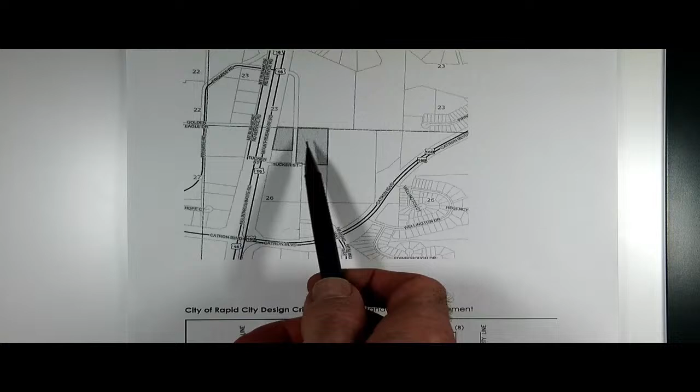Good afternoon, thank you committee for giving me the chance to speak. I'll try to make this brief. I am a property owner in the northeast quadrant of Highway 16 and Catron Boulevard. It's basically the only quadrant that hasn't been cleaned up and developed at that intersection. The DOT is going to be constructing an overpass at the intersection of Highway 16 and Catron. As a result of that work and the changing of the highway bed, Tucker Street to the north is going to be eliminated. These parcels are the two that I own, and these parcels are all of them that now take access from Tucker Street.

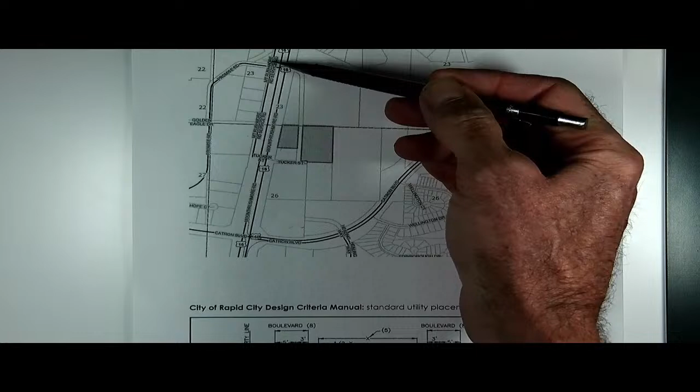As part of the abandonment of Tucker Street, the DOT is going to be constructing a city street, Promise Road, that will be coming down right here. Currently, city sanitary sewer comes along Highway 16 on the east side, and water is on the west side. The DOT is planning to construct Promise Road without putting in water and sewer. For whatever reason, they can build city streets without following the city's design criteria manual, nor get exceptions to that. For the DOT to do their work, they need right-of-way from me as well as construction permits.

When they initially told me they were going to be doing this work, I told them you are not going to have any problems with me. And when I saw the design, I'm like, well, where's the water and sewer? And they told me that they don't build water and sewer. In fact, they went so far as to design Promise Road without even surveying in the existing sanitary sewer and the effect that that would have on the road grade. And I told them I am not signing off on any street that serves my property that doesn't have the plumbing in the street. That makes absolutely no sense to me.

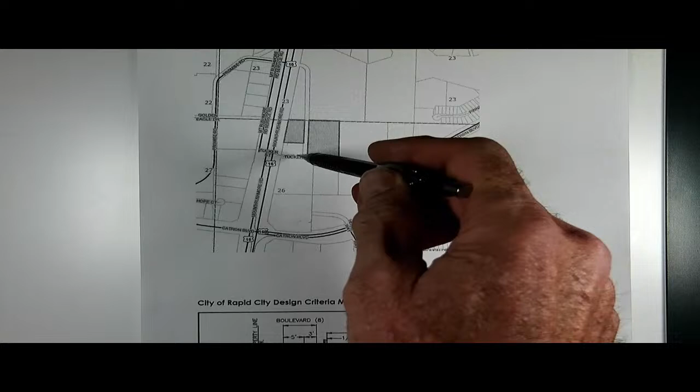I've talked to Public Works in the past. I'm like, the city does have some tools to facilitate the construction of the water and sewer, like doing an assessed project or charging hookup fees or whatever. I am willing to pay my fair share so that I got a street that I can use. And that apparently hasn't gone anywhere. At this point, the DOT is ready to begin a condemnation, and I want to get on the record saying that I do not support constructing a city street without water and sewer in the street. I'm prepared to do what I can to help, but I cannot build all this water and sewer for these property owners when I have no tools to recover that capital expense.

I know that we can't discuss that. I'm happy to take any phone calls or help that I can get from the city council to push Public Works into coming up with a solution with myself and the Department of Transportation. Thank you.

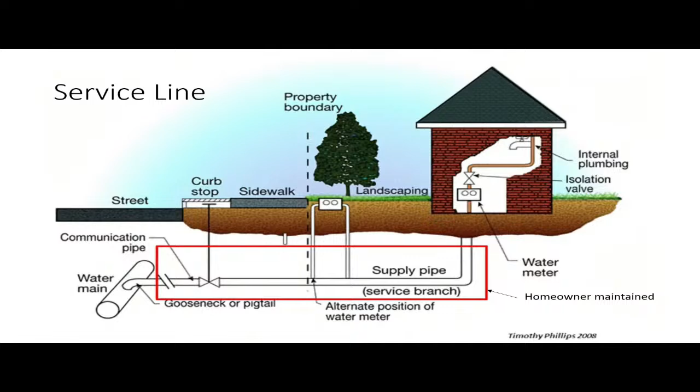The service line inventory was completed by looking at historic records, design standards, service line cards, inspections, and customer inspections. All service lines needed to be categorized into 4 different categories. The first being lead, the second is galvanized requiring replacement. Galvanized requiring replacement are galvanized steel lines that at any time may have been

downstream of a lead service line. We also have our unknown lines, anything that we could not identify any materials based off our survey of records. And then non-lead. Rapid City chose to identify the specific material when we encountered non-lead.

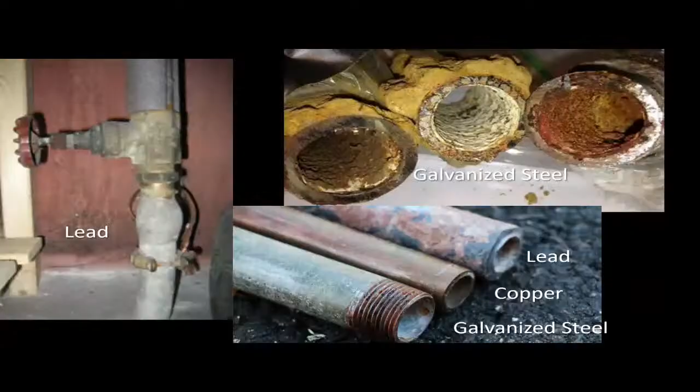So some quick examples of some of the lines, these are the ones you'd see most. Copper specifically is the one we would see the most, that's our preferred material for service lines. The picture on the left is a characteristic lead service line - lead has that wiped joint, it's a little bulbous material where they connect to a fitting.

Galvanized steel there on the top right shows the issues with galvanized steel. As soon as that galvanic protection on the inside wears out, you start getting rust inside the pipe, and that rust can start accumulating heavy metals, including lead. If you have a disturbance of the line, all of that rust can get knocked off in one shot and can give a large dose of lead to people inside that household.

So the Rapid City inventory took a 3-step approach. I did some pretty extensive digging through historic records and was able to pin down February 14th, 1980 as our first city ban on lead and galvanized steel lines. Our first step approach was if a household and street infrastructure was installed after 1980, we knew those houses were non-lead. We didn't specifically know what material it exactly was, but we knew it wasn't going to be lead or galvanized steel, so we weren't concerned about it.

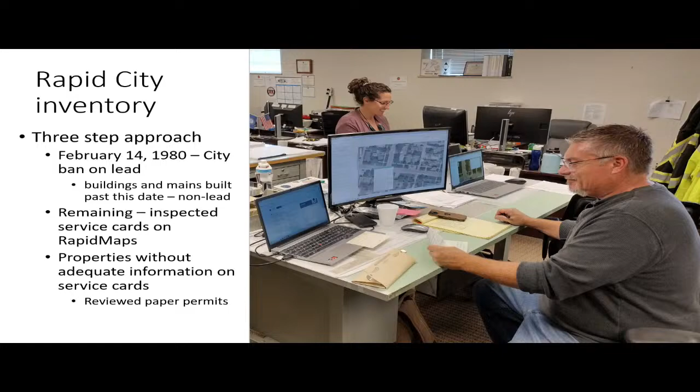So our totals, we're looking at about 109 lead lines that we identified. Galvanized requiring replacement was 142. Realize there are still some galvanized lines that count as non-lead, because if there was never lead upstream of that, it wouldn't count as galvanized requiring replacement. There's not that same risk of that flush of lead with the rust breaking off.

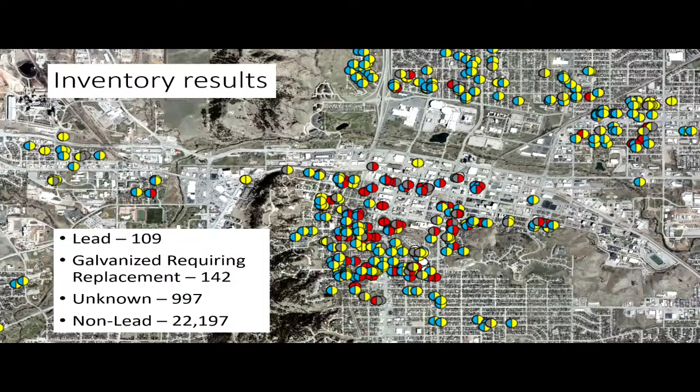We were not able to find documentation for just a hair under 1,000 of the properties. For some of those unknowns, we did identify half of the service line, we just couldn't identify what the material was for the whole service line. And then we were fully able to classify a little over 22,000 as non-lead.

The lead service line inventory needs to be posted online for Rapid City. Any utility that serves more than 50,000 customers has to have that online. We've chosen to accept the offer from South Dakota State to host the data on their master service line inventory, so the inventory will be accessible on their website, sdwaterpipes.com, and all of the inventory will be hosted there for the whole state.

We'll also have to submit letters each year moving forward for any of the properties that have identified lead, galvanized requiring replacement, or unknowns. That includes both the property owner and any renters in those properties. Our first planned release of letter notifications will start October 7th, and we'll release a portion every week until October 28th. Everyone will have to be noticed by November 15th to stay compliant with the code.

Some of the content of the letters: for customers that have unknown service lines, we'll direct them to go to sdwaterpipes.com. The state of South Dakota has set up a sampling protocol where you can use a magnet, do a scratch test on your service line, and take a picture based on the criteria in the survey. It should help you identify what type of pipe material you have, and that picture will help us identify the pipe material in the house. If customers have issues performing the survey themselves, we'll look at having staff support them and try to identify the materials from inside the house.

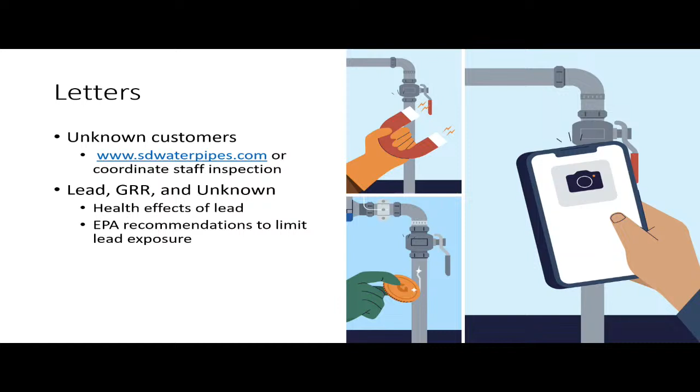All of the letters for lead, galvanized requiring replacement, and unknown will have EPA required language about the health effects of lead, and recommendations that the EPA put together to limit lead exposure.

A quick summary of how to reduce lead in drinking water: unlike some other contaminants, boiling water doesn't remove lead, so the lead will stay in water if you boil it. The best thing to do is flush the water outlets you use for drinking and food preparation. You can flush a line by opening the faucet and allowing the water to flow until it stops changing in temperature, getting colder over time. Wait until it's cold and at a steady temperature, then you know you've flushed all of the water out of your lead service line.

Regularly clean the outlet screens and aerators, which typically just screw off of the sink. Cleaning those regularly will help eliminate some lead impacts. Use cold water for drinking and cooking, so don't try to take a shortcut. If you're boiling water for spaghetti, don't turn on the hot water faucet. Make sure your water is cold, then use cold water to boil for food. That is especially important for baby formula.

If you choose, you can use a point of use filter. It just needs to be NSF 61 certified, and those can eliminate any type of lead that's in the water.

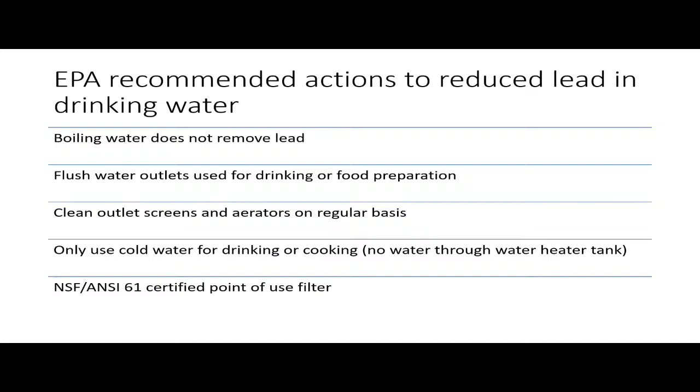Our service line inventory was part of the lead and copper rule revision, which is our current code. Hopefully in the next 2 weeks, we'll have the lead copper rule improvements finalized. The upcoming rule will obligate that all lead and galvanized requiring replacement lines be replaced within 10 years, after a 3-year period to try to identify all unknown service lines. If the code is issued this October, that would put all of our lead and galvanized requiring replacement lines on a deadline to be replaced by 2037.

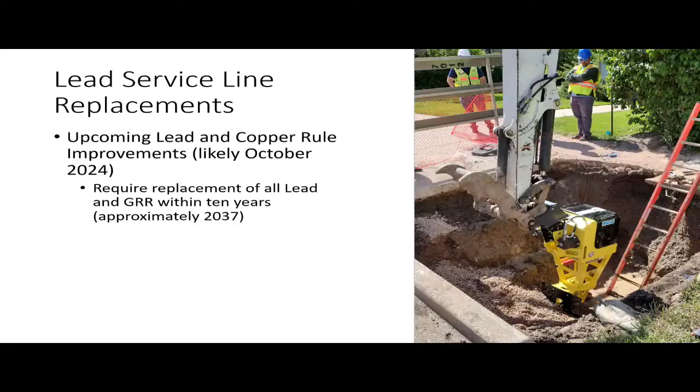There's a little device that pulls a cable all the way through the service line. That device grabs onto the new pipe. This new pipe here happens to be an HDPE service line. A tracer wire is followed along there so we can flag where that service line is in the future, and the pipe pulling equipment will pull the new pipe right behind the old pipe as we pull it out.

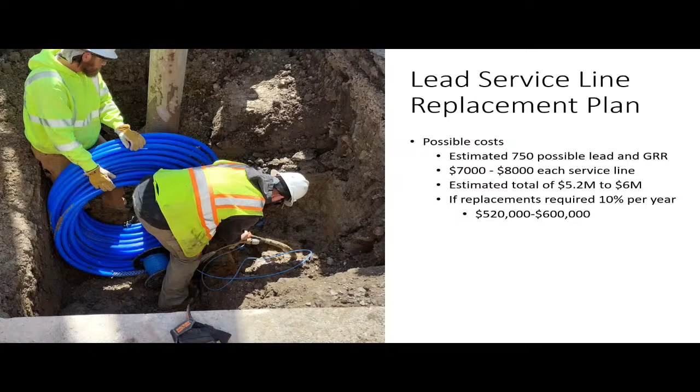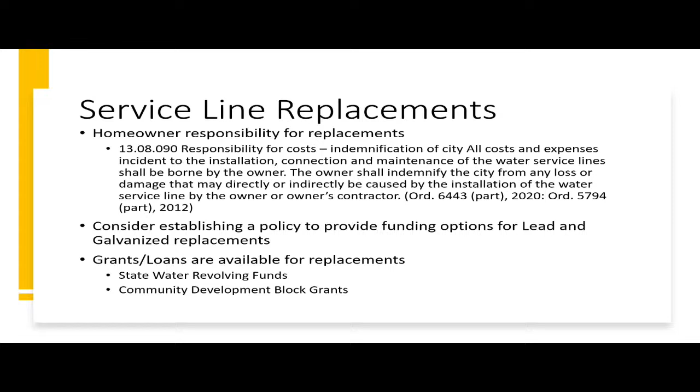In our current codes, the service line is entirely the responsibility of the homeowner. So we might need to consider establishing a policy to provide funding options for lead and galvanized replacements. There are some grants and loans available for replacements, such as state water revolving funds or community development block grants, but those are not for individual property owners. Those would be something the city would have to apply for.

Our current Rapid City lead mitigation program just did a new sample of lead testing at households that have lead service lines. Our 90th percentile is 7.3 parts per billion, and the current health level is 15. As you'll remember from last year, the 90th percentile means 90% of our samples were underneath that 7.3. What that's telling us is that based on our water, there's minimal corrosion, which limits the amount of lead that might occur while water is sitting inside a lead service line. Our water has a naturally basic pH and alkalinity that provide good corrosion control, and can even deposit a coating on the inside of service lines that mitigates or eliminates opportunities for lead to interact with the water.

We also don't allow repairs or partial replacements for lead and galvanized lines. So if they do have a leak, they have to be replaced in their entirety.

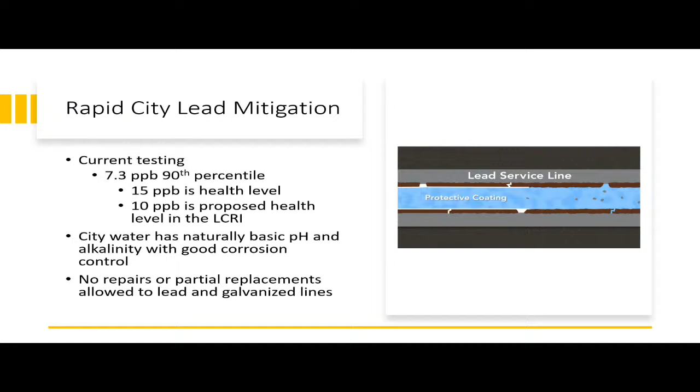Our next steps: we're going to want to work with the homeowners of service lines with unknown materials to help identify those material types. Then, once the pending lead and copper rule improvement is issued, we'll develop a replacement plan based on that specific code.

If you receive any calls from constituents about receiving this letter, we've got a communication process in place. Just direct them to call the Water Division, and we'll have staff that can help them proceed with the process outlined in the letter and answer any questions they might have.

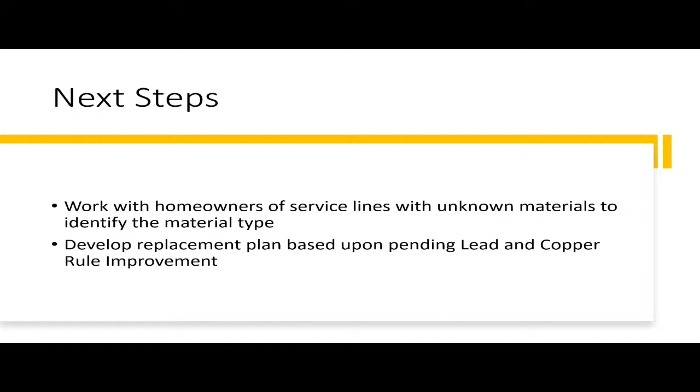So with that, I'm open to answer any questions you may have.

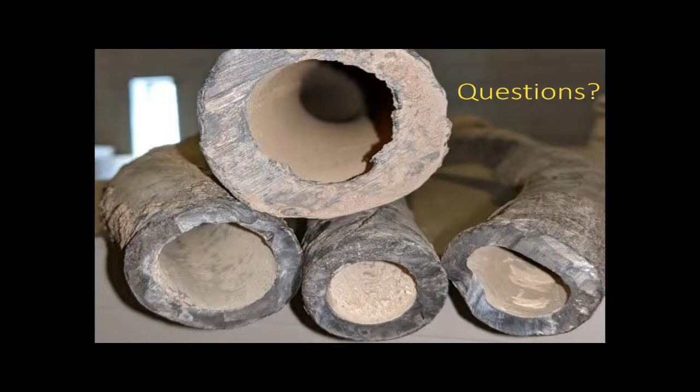Thank you, Eric. I have a question. So will the city be the one replacing those lines, or will subcontractors be used for that?

Mr. Chair, the water line replacement plan that would come based off the pending code would outline that strategy. I think we have the opportunity to self-perform a lot of the work, and that's why we purchased that pipe pulling equipment. That might not necessarily be the most cost-effective or beneficial approach for our customers, so we'll have to work through that process once we fully understand what the pending code is going to be. Thank you.

Thank you. Thank you so much. I just wanted to say congratulations on the 2023 Best Water designation. That's a pretty amazing achievement in a time where water is such a valuable resource. I know the lead copper service line replacement will be a big feat. We had a lot of our Center City older developments included in your map.